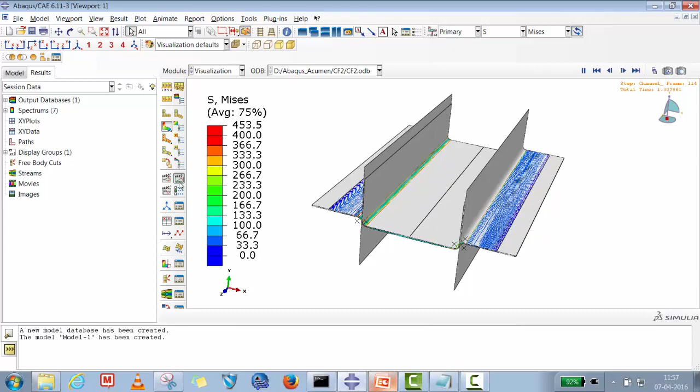Today's session will be on manufacturing simulation, and in this particular simulation we are going to do a deep drawing. So right now on my screen, in Abaqus viewer, you see a deep drawing process. We are going to form a channel. Let me switch off some of the elements of die, punch and holder.

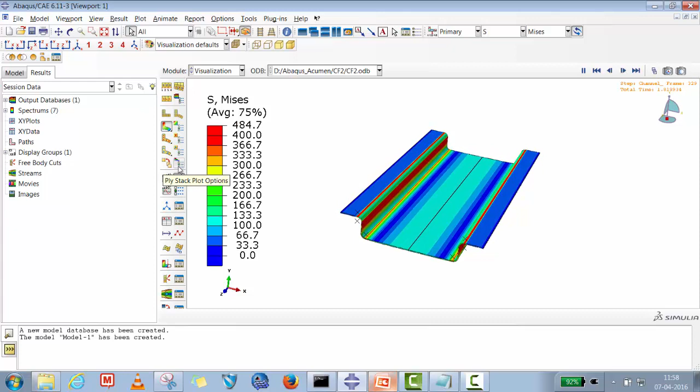So this is what exactly we are going to do: form a channel, like a deep drawing process. It's a 1 millimeter by 200 millimeter channel, and we are going to go for a deep drawing process. This particular tutorial is available in the Abaqus help manual. A couple of people have also done this on YouTube, but there is a lot of confusion on how to do it. If you see in the front view, there are two curvatures, and we'll do this deep drawing. The yield stress is 400 MPa, so whatever goes beyond 400 MPa goes into permanent deformation.

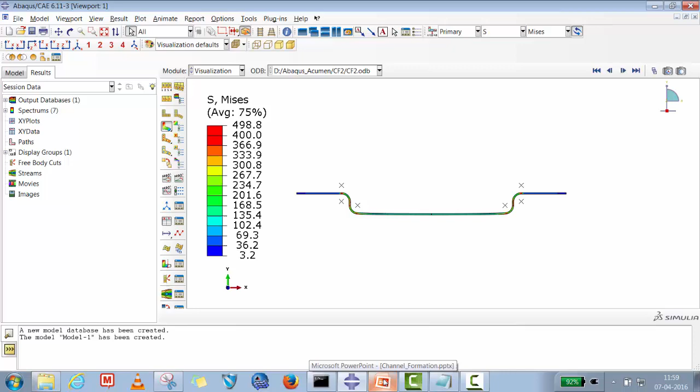So this is exactly we are going to do. Let's go to the drawing board and quickly see what we are going to do: a deep drawing manufacturing simulation. In this simulation we are going to form a channel. The typical arrangement for this is you have a blank, which for our case will be a 1 millimeter by 200 millimeter blank. We'll have a punch, a holder, and a die.

The holder will put a blank holding force of 440 Newton on the blank. This will be a two-step process. In the first step, you'll just keep the workpiece and put a blank holder force of 440 Newton, and then we'll give a punch travel of 30 millimeter, and then we'll see how it is forming and what issues arise. That's exactly what we are going to do.

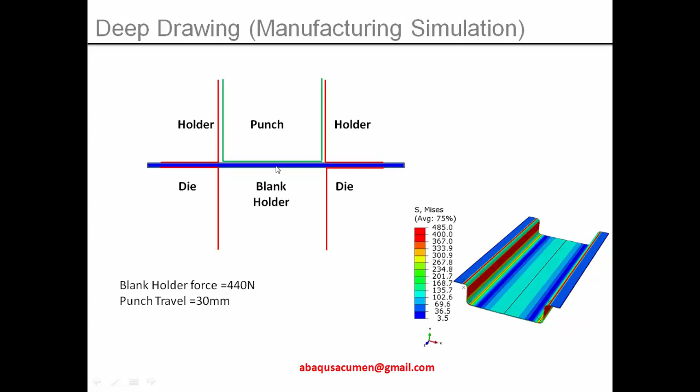Now looking at this problem as Abaqus Acumen, what we are teaching the Abaqus user is to look at what we can use to simplify this problem. One thing we can do is take advantage of symmetry, reducing the number of elements by half. Second, since this is actually a 200 by 300 millimeter length channel, the strain in the third direction will be constant, so we can quickly make it a plane strain problem, again reducing the number of DOF without compromising much on the results.

This will be my last slide, and then we'll quickly go to Abaqus CAE. We'll model the workpiece as a 380x steel, 1 millimeter thick, 200 millimeter length. Typical steel property, yield stress is 400.

Again, the important point, which we also discussed in the sheet metal bending problem, is that this particular problem we are going to do in Abaqus Standard, so the solver will be implicit. You can do this in explicit, but when using explicit it should be a quasi-static problem where inertia forces are minimized. A lot of people do this problem in explicit without making it quasi-static, so there is a lot of inertia effect that can mislead the results. We are going to do it in Abaqus Standard, solver implicit, so there is no inertia effect and you don't have to worry much.

We'll convert the problem to 2D. Since the perpendicular third length is high, the strain in the third direction is constant, so we'll use a plane strain approach. For this, we'll use CPE4R, a 4-node bilinear plane strain quadrilateral element, with 3 DOF: X, Y, and Z rotation, taking advantage of symmetry.

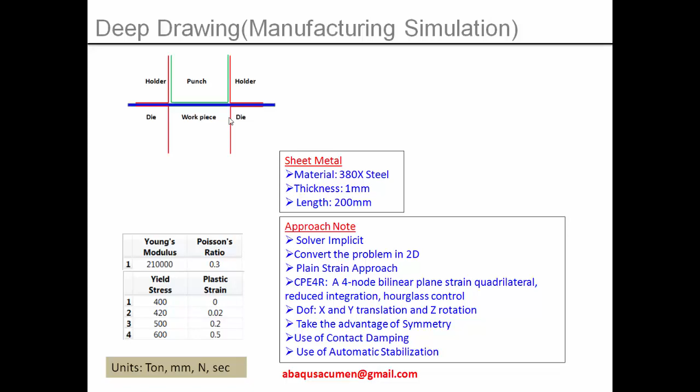We'll also use contact damping and automatic stabilization for this problem, because there is quite a bit of rigid body motion. Again, a word of caution from Abaqus Acumen: whenever you use contact damping or automatic stabilization, you should always check the stabilization or damping energy. It should not be more than 5% of the strain energy developed in the component, otherwise the results are not accurate. So let's go to the drawing board.

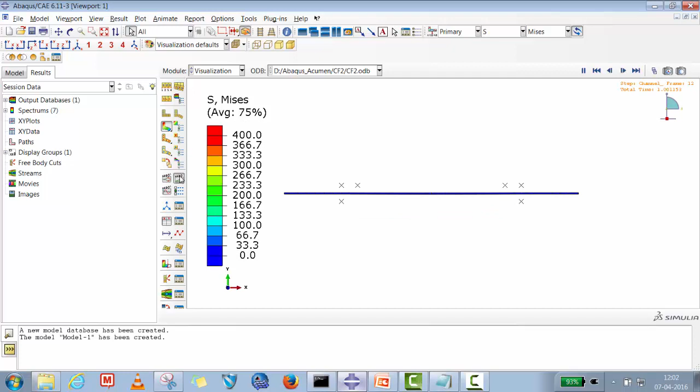Again, I'll show one more time this animation. This is exactly what we are going to do: we are going to form a channel.

So let's start. We'll say new, and then I'll set a working directory.

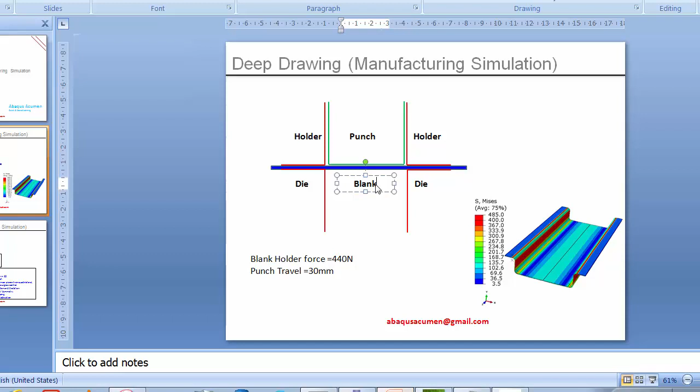Now the first thing we'll create is quickly a workpiece. We're going to first create a blank, a 2D deformable shell, approximate size 300. I'll quickly put 0,0 then 100,0, 0,-1, 100,-1.

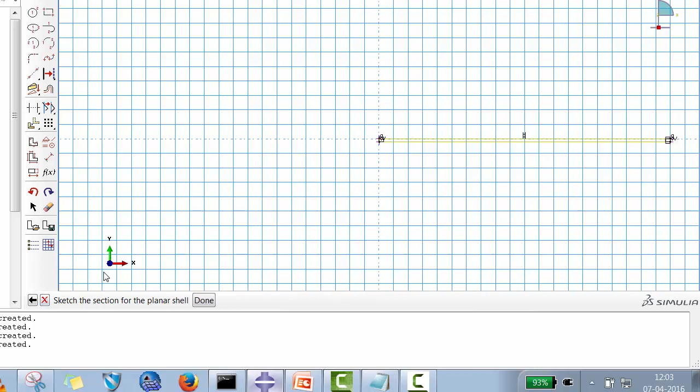I'll quickly create this, and then we are done. I'll also split this in the center. The reason I'm going to split it in the center is because then we have to define some contact here and some contact there.

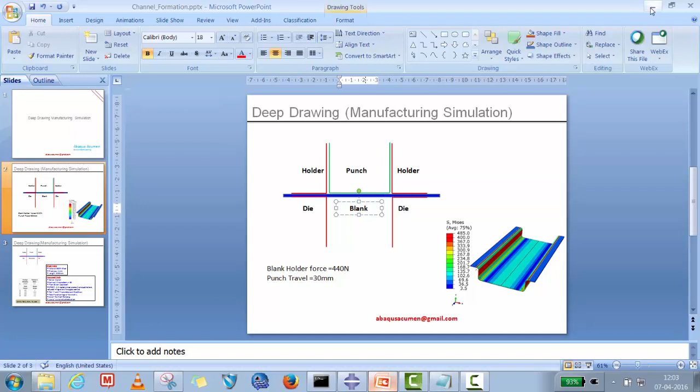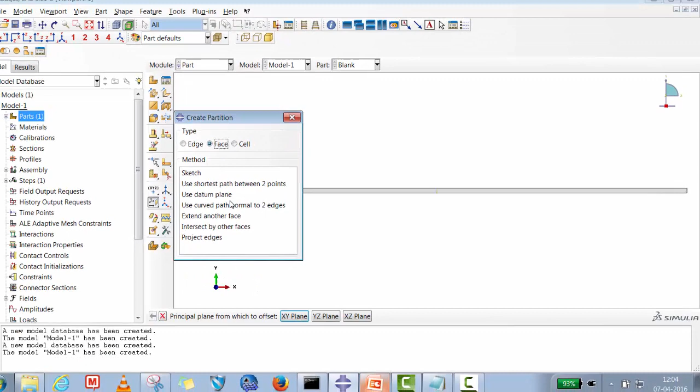So let's split it in center using a datum plane. We'll create one datum, a YZ plane around 50, so we get a plane here. We'll cut the face using the datum. We selected datum, create partition, done. So now we have just split this, because then when you select the edge for contact it will be easier for us. So we created the blank.

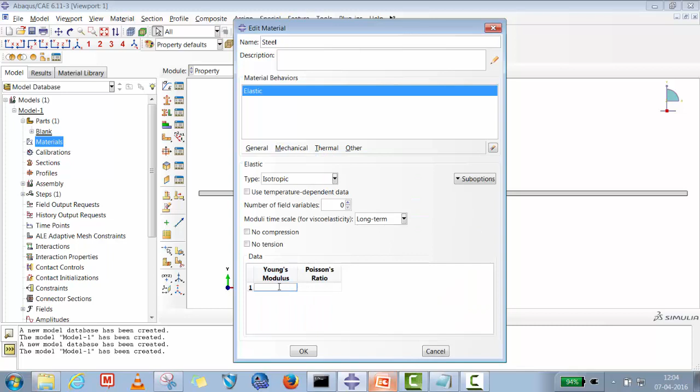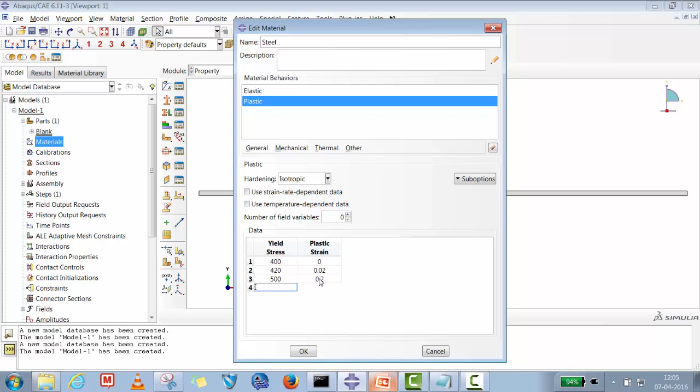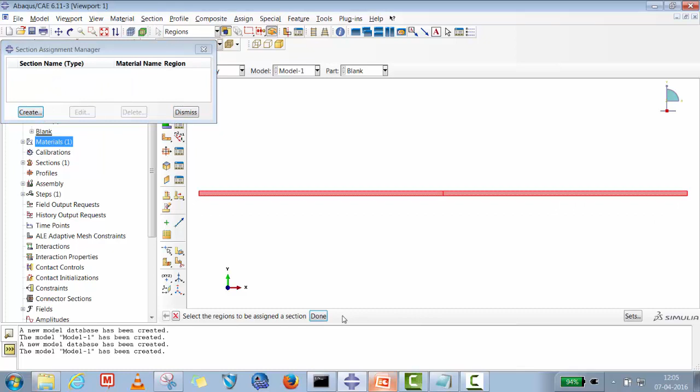We'll create plane strain. For plane strain, you have to take a solid homogeneous section. You created that, and we'll quickly assign this. Done, we assign this. As soon as you assign it, the color changes.

Now we'll quickly create the holder, call it holder, it will be 2D. You have different options here: discrete rigid or analytical rigid. My preference is discrete rigid. There is no difference, only for discrete rigid you can make a mesh, and for analytical rigid you don't have a mesh - Abaqus will generate mesh for the analytical rigid. Whenever I have to select between discrete rigid or analytical rigid, I prefer discrete rigid, because then you can control the mesh, and once you control the mesh properly, you can control the contact.

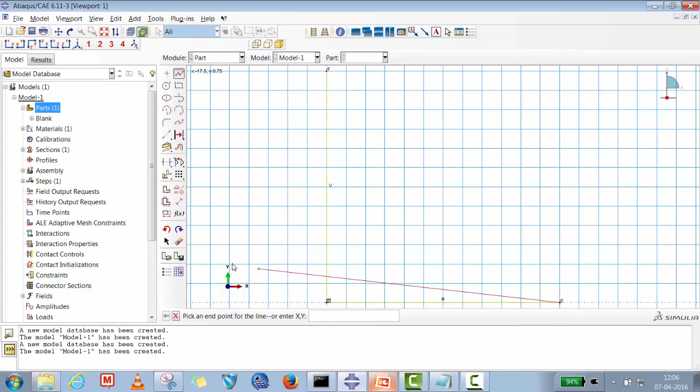So I'll select discrete rigid for the holder. I'll start at 0,0, this is easy for me to go from origin. Then 60,0, I get another point, and then 0,60, so I get 3 points. Now I'll just quickly put a line, so this is one to this and this, so this will become a right angle. Then I'll just give a quickly fillet of 5 millimeter. So fillet is done.

So done, you created a holder. Now this is rigid, make sure you assign a reference point. We assign a reference point. We've done that, we'll create now the die.

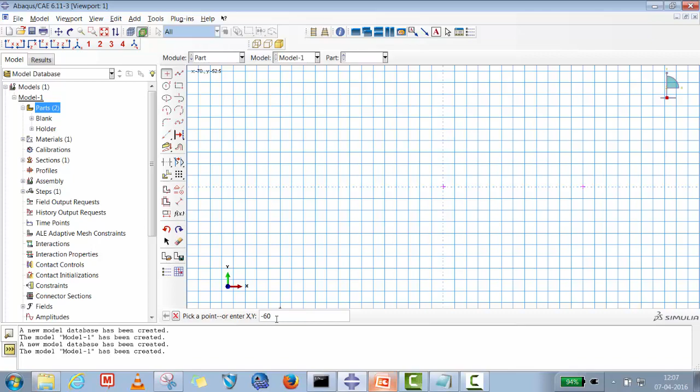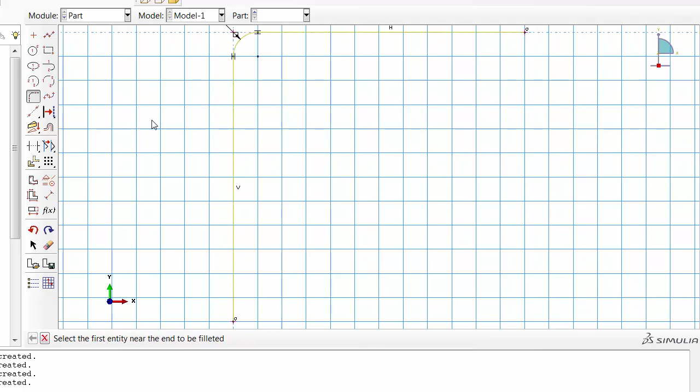Again 2D discrete, we'll put 0,0, then 60,0, minus 60,0 - sorry, this will be wrong, I'll delete this. The point will be 0,-60, so I get 1 point at the bottom, so you get this right angle. I'll quickly create this, go to the fillet, the 5mm fillet, I'll say OK, and this is done.

So done, you created that. I'll just attach a reference point here. So you've done that, now you created a blank, die, holder. We'll quickly create the punch.

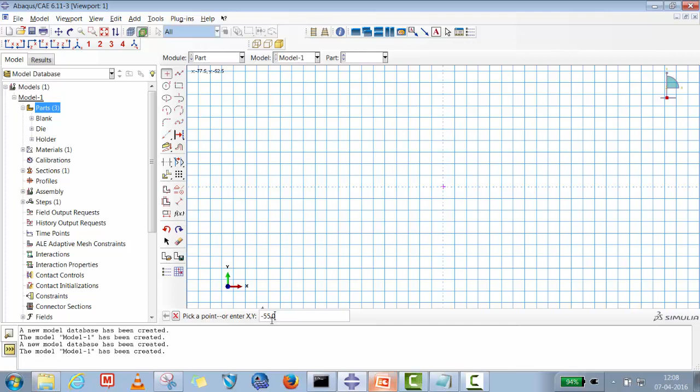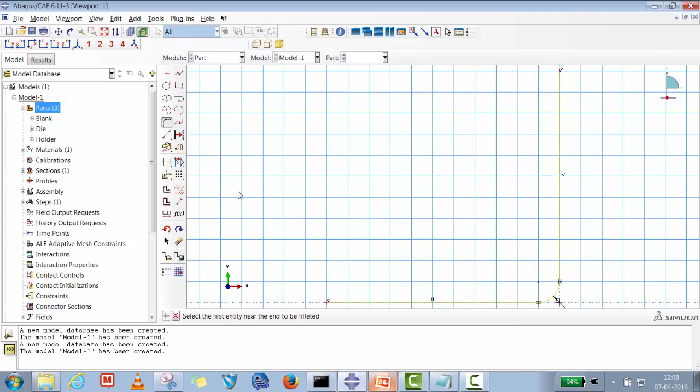2D discrete element, we'll start again from 0,0. Then it will be 55 by 55, so it will be 55,0. Then minus 55,0, and then 0,55. So the blank and the holder will be the same dimension, 60 by 60, right angle, and then you have a fillet there. The punch will be 55 by 55 with a 5mm radius. So you've done that, you put 5, and then you created a fillet. So you've done that, we'll quickly select a reference point.

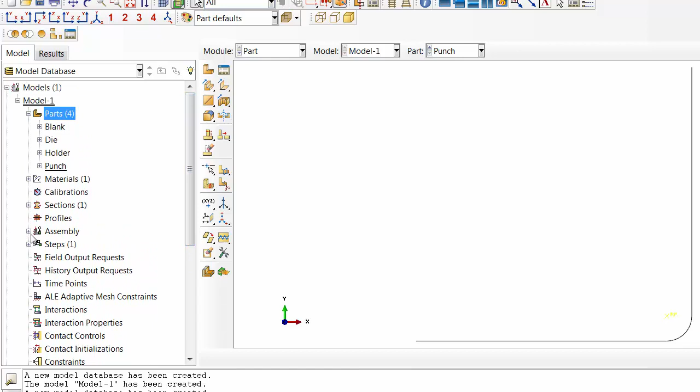So you've done that, so now I think we created all the components. We assigned the blank all the necessary properties. Now we'll quickly make an instance. So we created the instance.

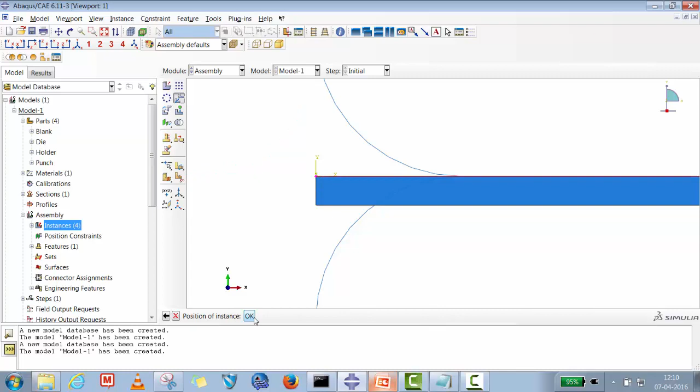Now the one more part we have to do is we need to shift everything. The first thing we'll do is I'll shift the die first. So from this point, this will be my second end point. So okay, I shifted that.

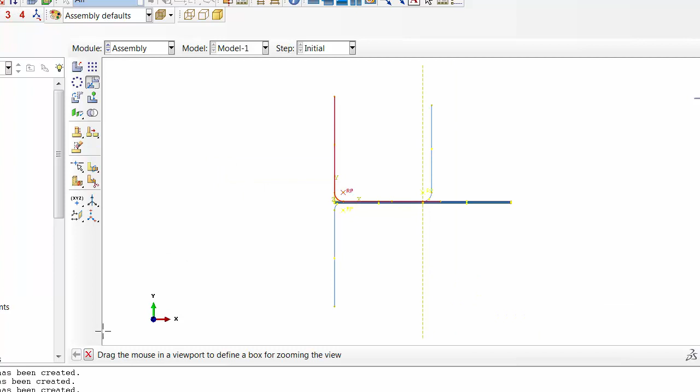We'll also shift - first I'll just shift from a point. What I'll take as a starting point is this curvature starting point. So I select this, I'll just go to this. So this is okay. So we have that. Then I'll also translate this one.

I'll translate from this point to this point, so they should be aligned to each other.

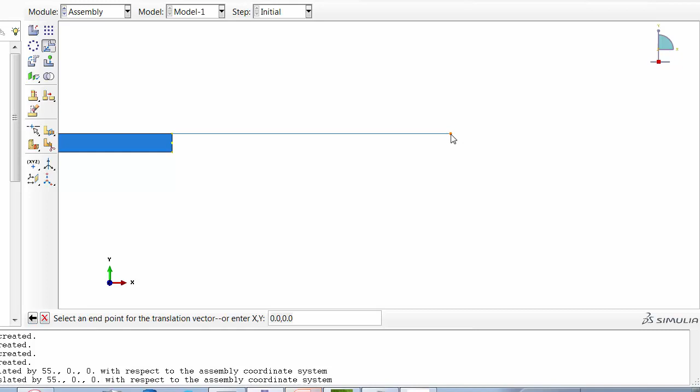Now one more thing, actually the die is penetrating the workpiece, so we need to translate the die by 1mm, down 1mm. So 0, -1.

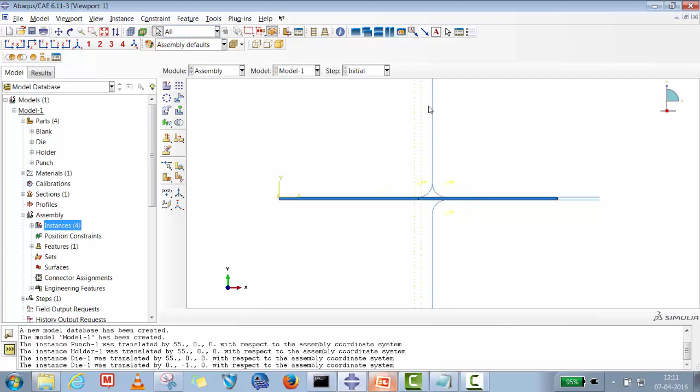So now it is positioned. I need to fix this edge to edge connection between the holder and the punch, moving it by 1mm. So this is 0, 0, 1, 0.

So it's moved. Similarly, I have to move the die, 1, 0.

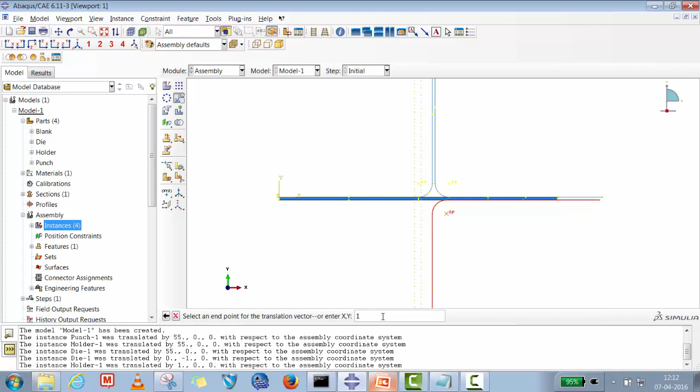So now, guys, you see what we have done. We have created a blank, a punch, a blank holder, and a die, and between these there is a 1mm gap, and everything is done.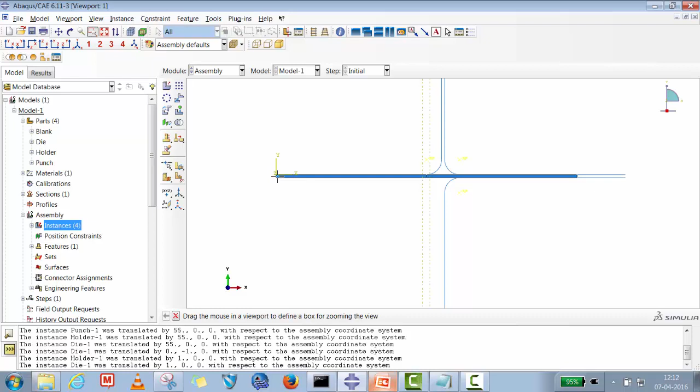Now we'll quickly create, for the first case, a symmetry boundary condition here on the workpiece. It is symmetric about X, so I'll go and create this as symmetry X, select that, and say done.

I'll create a surface, slave 1 blank. For that I'll select this and control-select the other also. So done - I think it is not created, so I'll delete it again.

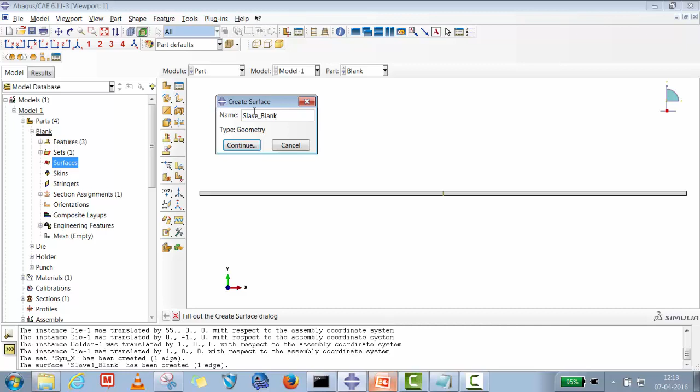So we'll create slave blank, slave 1 blank. You select this and then select this, putting a shift, then create. So this full thing is there.

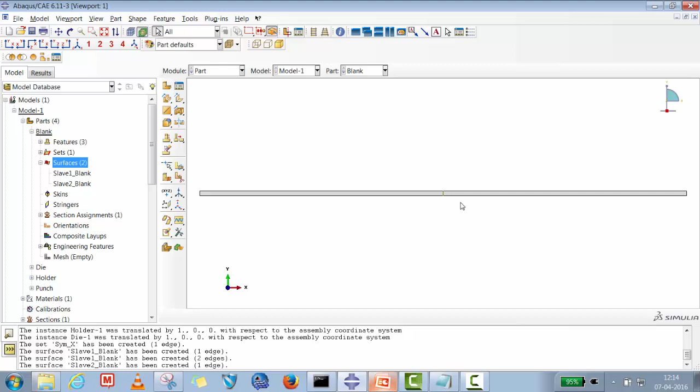Then we'll create slave 2, which will be this edge and the holder, and the other thing will be this edge and the blank.

So let me check once in assembly how they look. It's okay - this and this are in contact, this and this are in contact, so we are done. Now the top full surface we have taken, which will have contact with the punch, holder, and the half edge will be there, and then the die and half edge will be there.

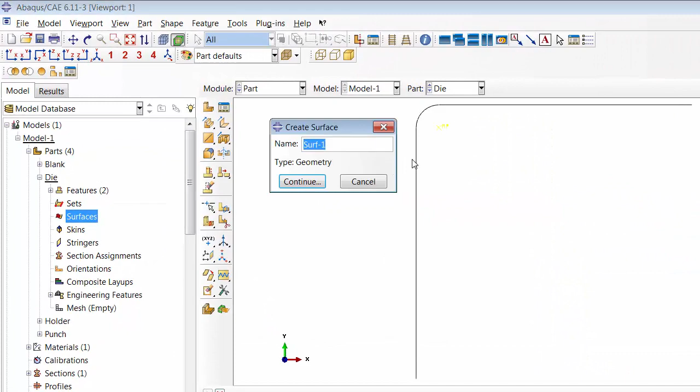Now we'll create a surface on the die, so we'll create surface - master die.

Done, now this is important, guys. I just flip this, and I'll also flip this, so now everything is the same, because these normals were different - I just corrected the normal. So I'll select the magenta, since we require the surface which is outer, not an inner surface.

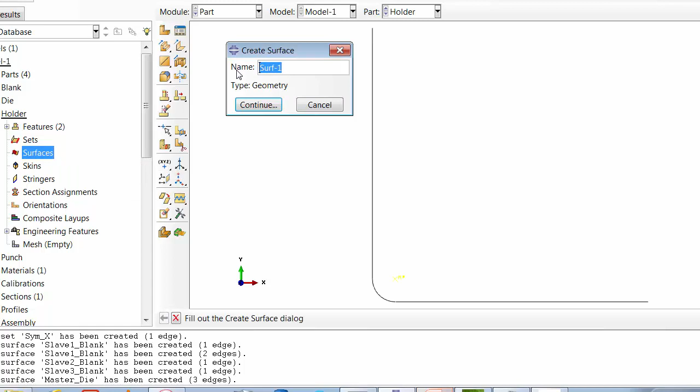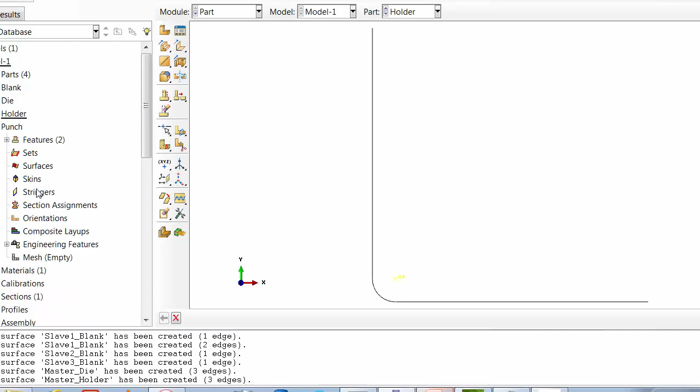This is for the die. Then we'll select one for the holder - master holder. We'll select this, select yellow. So this is done, and then we'll select one for the punch - we'll select yellow. So we created the surface now.

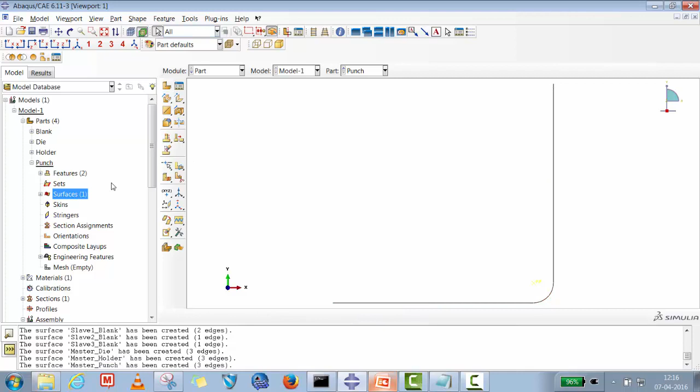Now first we created 4 parts. We assigned the material property section to this. We are done with these surfaces here. We'll quickly do meshing.

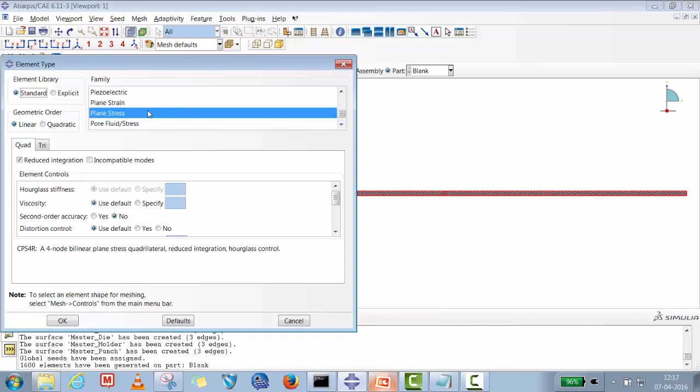So for the blank, at least we require 3 elements across the thickness, so we'll put global mesh size around 0.25. You say yes, and then assign all this to a plane strain problem - standard linear, you come down and see plane strain. By default it is plane stress, so when you get to 2D you change it to plane strain, say okay, done.

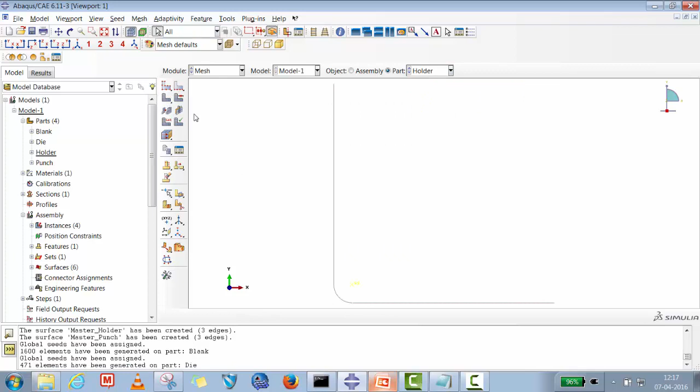Now we'll quickly select the die, and the advantage here is with a discrete rigid - you control here, I'm going to put a finer similar mesh here so it will have better contact. Contact issues generally occur when you don't have a fine enough mesh on the analytical rigid also.

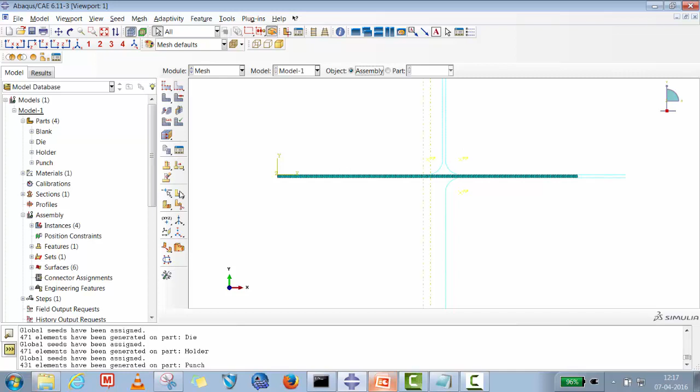So you created all that, now everything is ready. We'll go to the interaction property, create friction - friction will be 0.1 for this. So tangential behavior, penalty friction, you put 0.1.

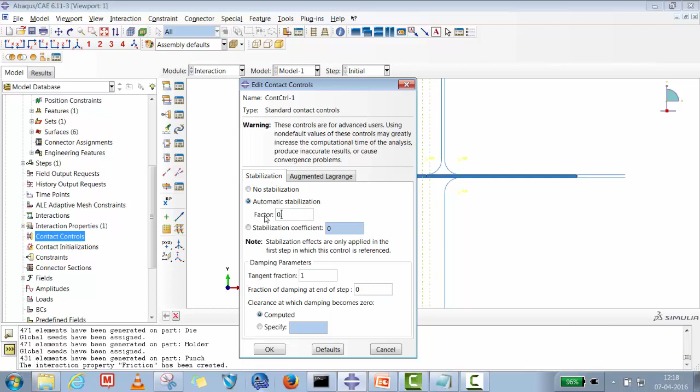Contact control we are going to use automatic stabilization - we'll put normal 0.002, a very minimum factor here, and we'll define contact now.

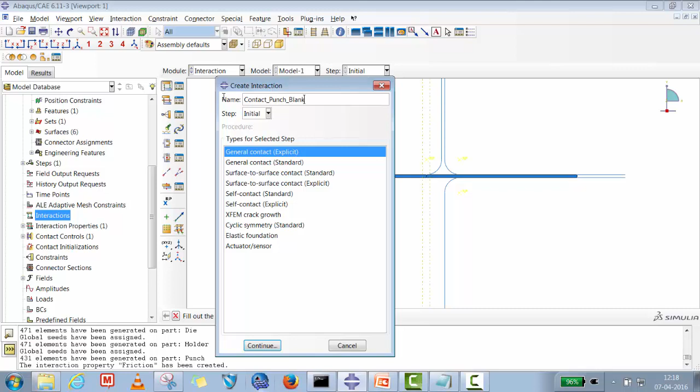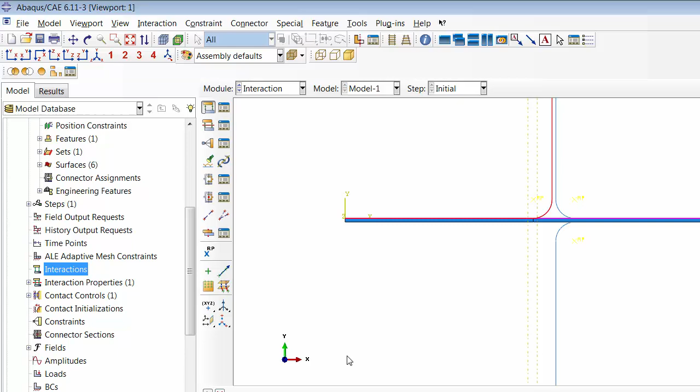Create contact - punch and blank, surface to surface standard contact. For master surface, you select punch, you can see it is highlighted here, and for the slave surface you take first the blank, so the whole blank is selected, and we are going to set the contact control, which will be the contact damping.

This will be the first, then I'll create two more. Contact holder and blank, continue.

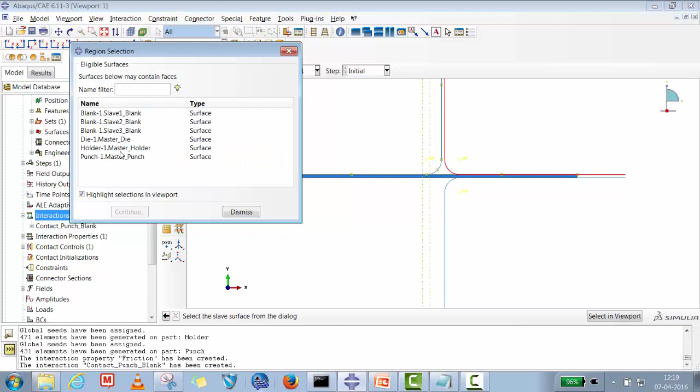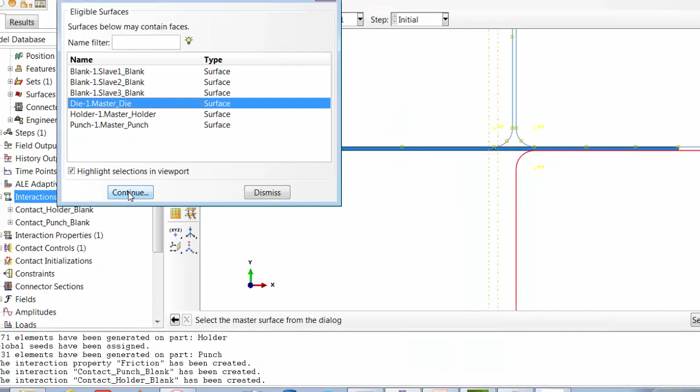Done that, we'll create contact die and blank. So die is selected, and then you select the blank, and make sure you select here. So done with this, I'll just check whether I selected correctly.

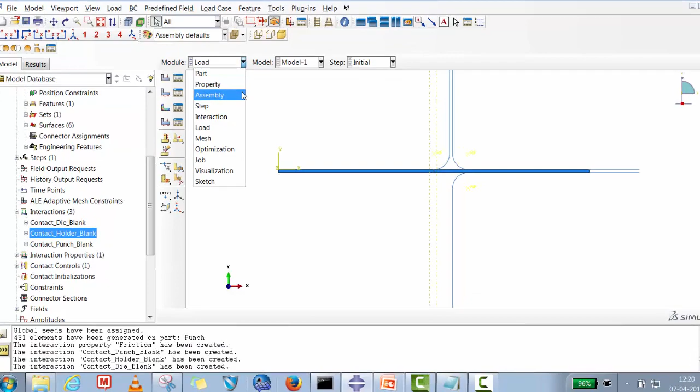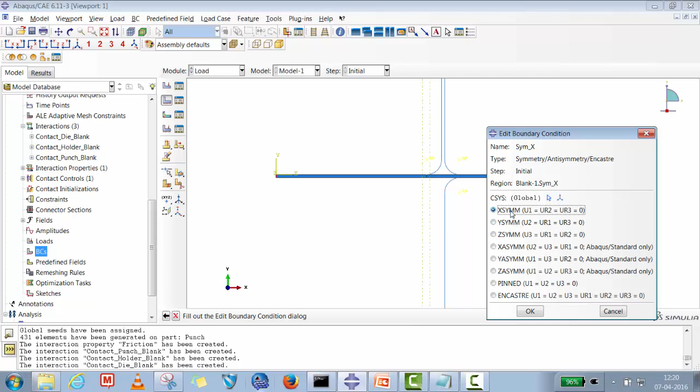Okay, everything is done. Now one more thing we'll do - we'll go to loads and boundary conditions. First thing we'll do is put a symmetry boundary condition. Symmetry X will be before the step, applicable for the fourth step. So for the symmetric boundary condition, you select the blank symmetry edge, and then you see X symmetry - so we have done that.

Quickly we'll create a step, this will be the holder pressure, holder force.

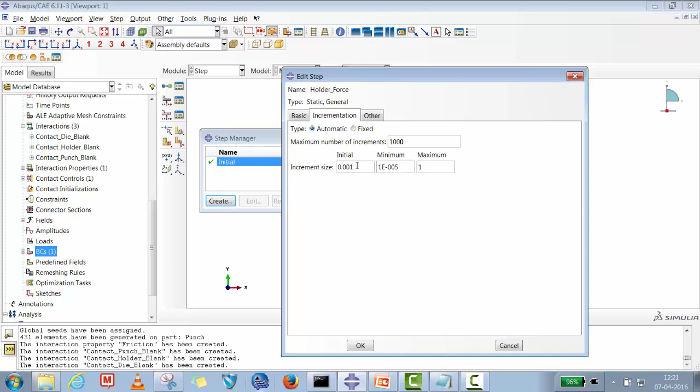We'll jump on and use automatic stabilization by default, whatever is there for damping. Increment we are going to make 1000. We are going to start with a very slow load, and this will be the holder force.

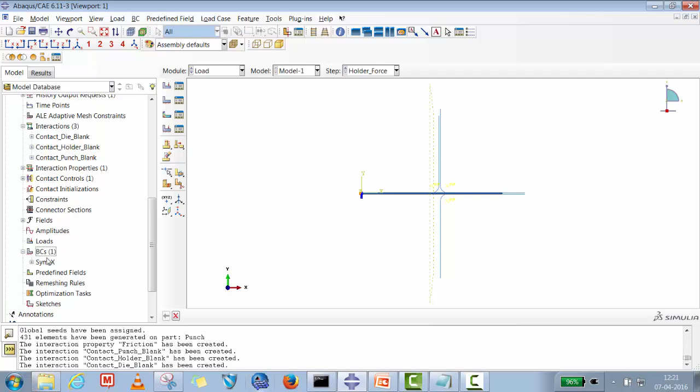So we have created that. We'll also create now, for the first step, a boundary condition for the die. So the die will be fixed, so we'll select the die reference point and select die is fixed.

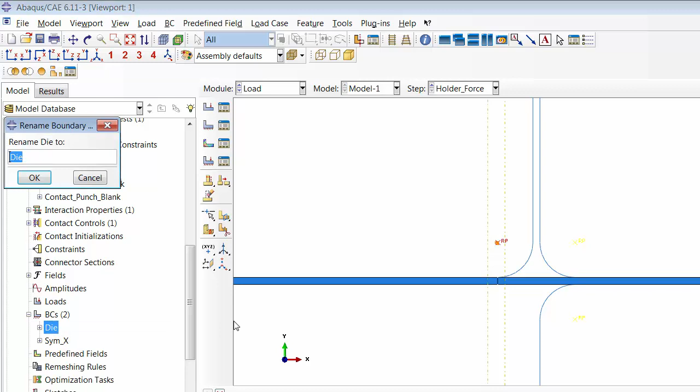Then we'll create - I'm sorry, I have to delete this, it is not, we have to rename it - it is not die, it is punch. We'll create for die, it will be fixed in all off, so X, Y and Z rotation.

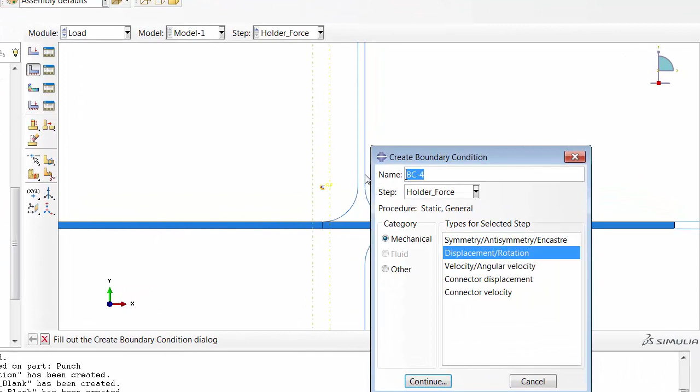So X, Y and Z rotation, and for holder it will be X and Z rotation, Y it has to be free to move.

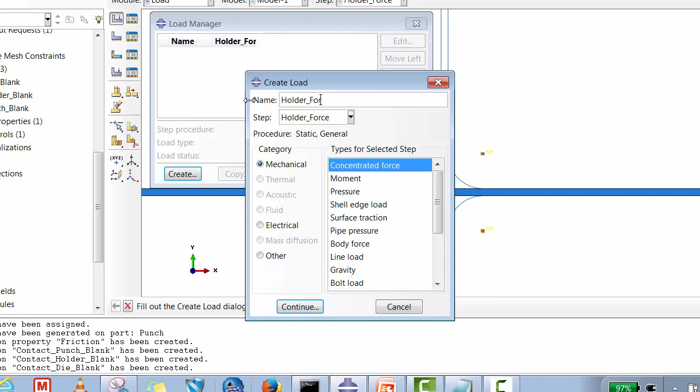Now I'll quickly apply load, which will be the holder force. It will be concentrated force on this point. So it will be minus 440, and we'll put a follower force. So this is the first step. You have a holder, and then with a blank holder force of 440, the blank will keep.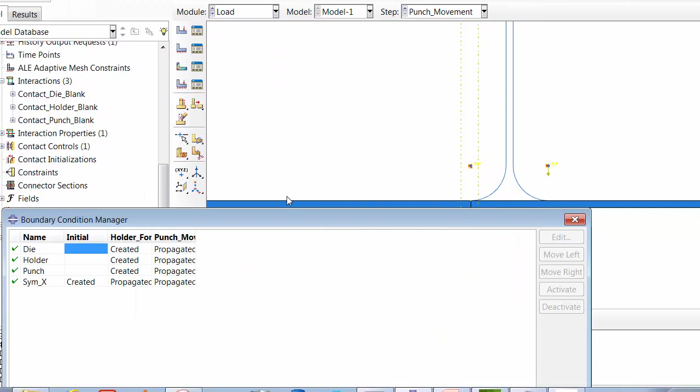So we created that. Now one more thing you have to create is you have to change the boundary condition for the punch. If you edit, here actually the Y stroke of 30 millimeter is there, so it will be modified. The symmetry boundary condition is before the step, then you fix the die and punch for all DOF. The holder you just keep X and Z, it's free to move in Y, then you apply the load. The die is fixed, punch holder, the force is there 440, we modify this.

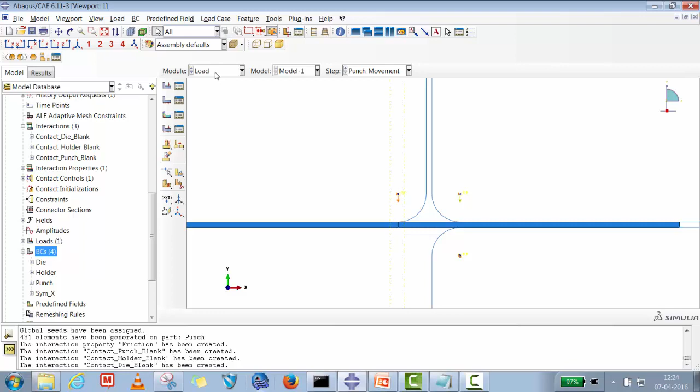So this is what we are done. I think we are ready to run it. So I'll just create a job name. Let me create, so we'll create channel formation 2.

We'll go for a data check. If there is any issue, we can quickly check it. So we'll just wait for a data check. Once we get a data check, we will get confirmed that there is no issue related to preprocessor. So whatever issue comes in later part might be because of solver issue, convergence issue or anything. So let's wait for a data check.

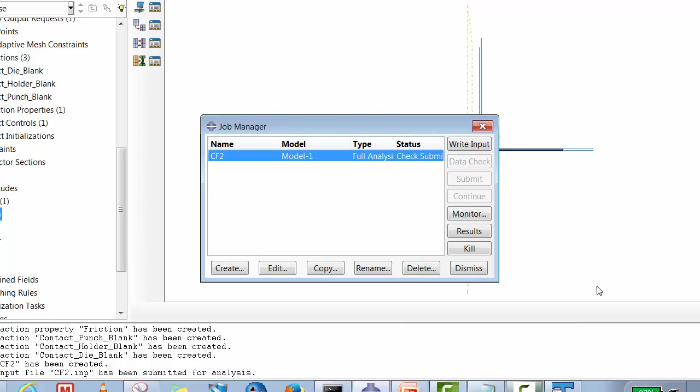I guess once we have data check done - so data check is done, guys. We'll submit a run and then wait for the results. So let's submit the run and then wait for results.

So guys, the results are out, and right now on my screen what you see is how the deformed shape - this particular one, Mises stress we are looking, and then you can see it just taking a shape. So it just bent. I'll just quickly check at the first step.

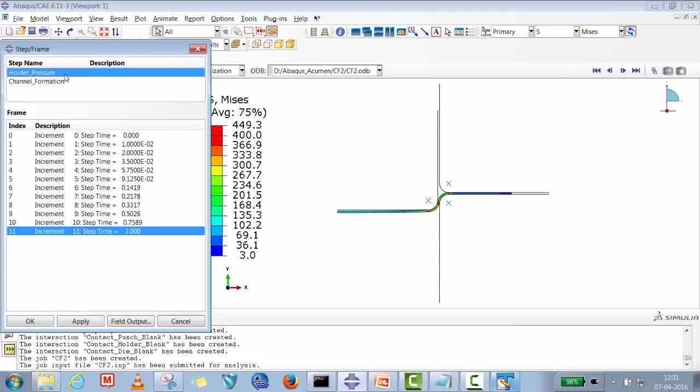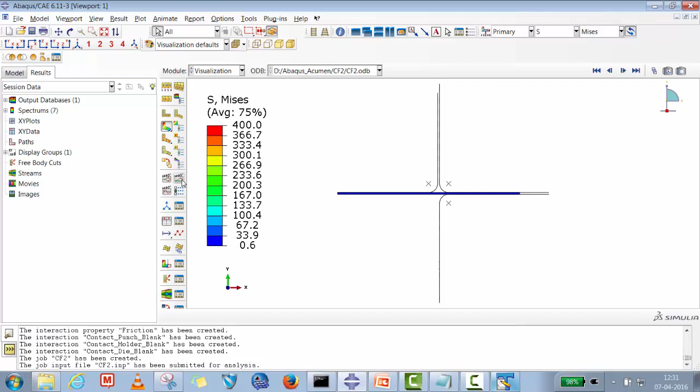This is like a holder pressure you apply, and then we'll just check a field output stress for that. So not much stress generated, and then it is with a punch stroke of 30 millimeter, it starts forming this bend shape. There are some stresses which are going more than 400, and then this forms.

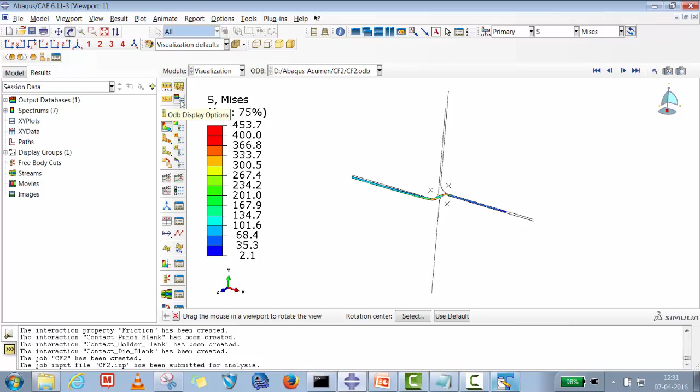So this is 2D now. I guess this will help some of you how to convert into 3D. So you go to ODB display option, you create here a 300, so this will be extended by 300, and since we are using symmetry, we'll put that symmetry here. So you'll see a full model, how it is forming a channel section.

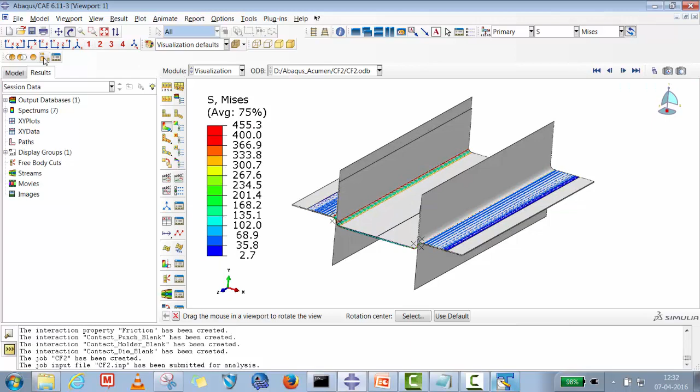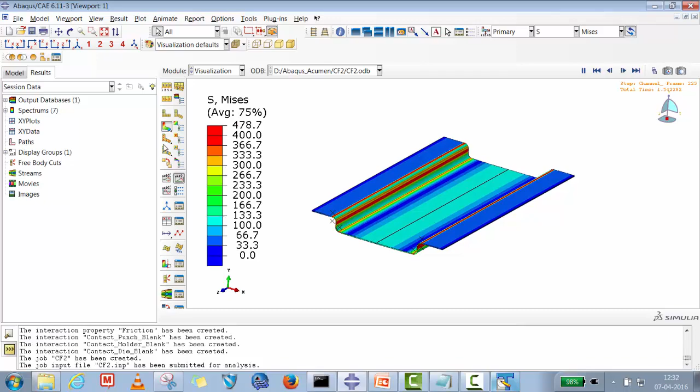And I'll just remove this all - rigid die, holder, punch. So this is how it is, this is creating. This is actually available in the Abaqus tutorial, only a lot of complexity is there in the language or method they use. We simplified it, and this was one of the videos in metal forming, just to get a deep drawing. So you can try this out with Abaqus standard.